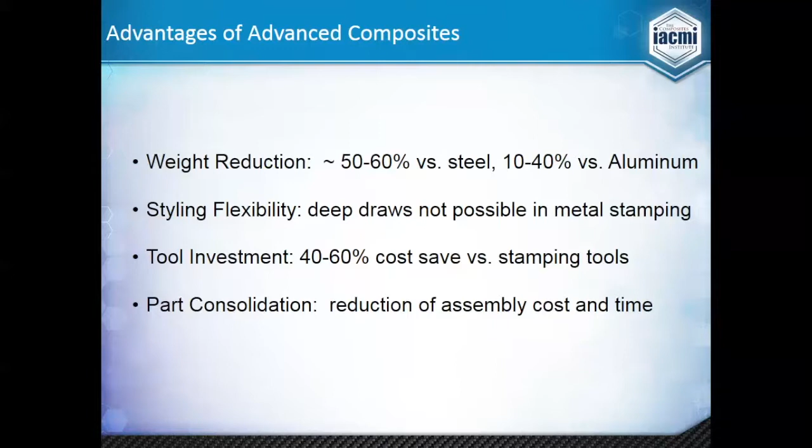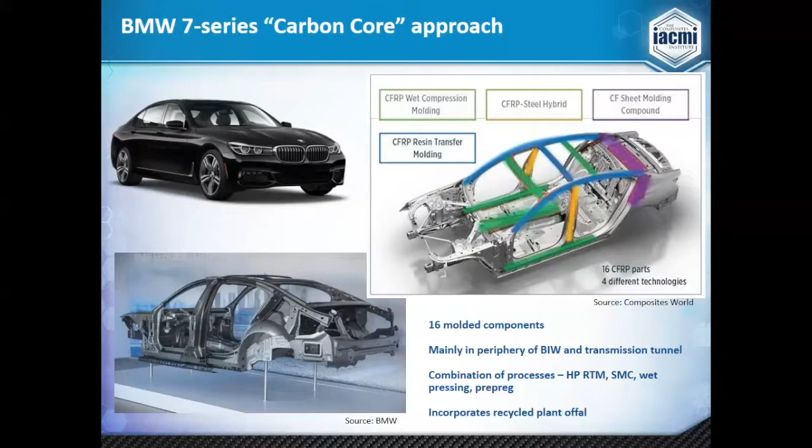People talked for a long time about all-carbon composite cars and full composite structures, but I think we're entering a world where we need to think smartly about multi-material design. BMW has led the way here, taking 16 carbon fiber molded parts and putting them mainly in the periphery of the vehicle to give it overall torsional stiffness. By doing so, they allowed a lot more aluminum and much thinner gauge steel in many areas — basically taking 15 to 20 kilograms of carbon fiber and converting that into a 146 kilogram overall weight saving by downsizing other systems. We think this is probably a real opportunity going forward, and notice they used four different technologies to do this work.

So this creates opportunities. If we look at the world of automotive — and there are obviously opportunities outside automotive too — a global market of 90 million units, with 10% of vehicles going to this approach, assuming we can drive costs down to make it attractive, at 15 kilograms per vehicle, you're talking 135,000 metric tons of carbon fiber. When you add resin and make those into parts, you're talking about 500 million pounds, half a billion pounds of material per year — that's just 10% market penetration with this sort of approach.

But the key thing I really want to emphasize is the number of parts — with these kinds of parts and their average weights, up to 144 million molded parts have to be made every year. That's an awful lot of tools needed. Put this in context of the current market for carbon fiber, which is only about 80,000 metric tons for all applications, including Boeing, Airbus, sporting goods, all current automotive applications, wind turbines, whatever. So we're talking about something that would almost triple the current market at 10% penetration — if you got to 20%, you'd have a 4-times market. So there's a real opportunity to get there.

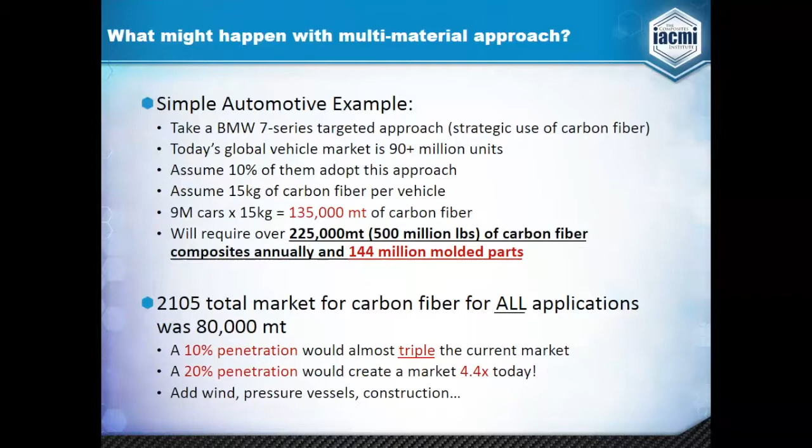Some of the barriers that we see, cost is the biggest barrier—the cost of composite parts and so forth. One is certainly attributed to the material and the high price of carbon fiber, and there's a lot of companies, as well as IACMI, addressing that.

The amount of recapitalization needed—you can't get everybody to throw out all their old processes. So if you're thinking of stamping situations, how can we stamp carbon fiber or recapitalize or use some of those? But there's a tooling aspect to that as well, the retooling that occurs, and then the qualification processes, which tend to be fairly lengthy.

In terms of speed, continuous fiber lamination is an issue. Material transfer robotically is not as fast as it needs to be. And then the big thing is this prototype process, and this really comes into where tooling is important. If we're doing iterative prototyping, the cost of building multiple tools to do that prototyping really lengthens product development, but it adds a lot of cost as well.

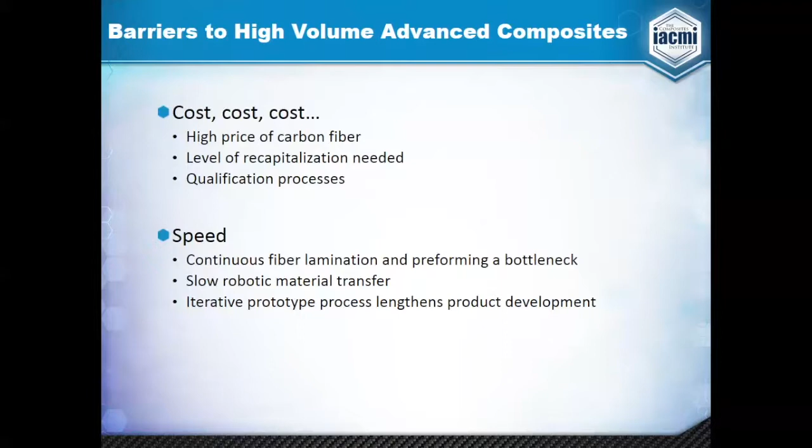From an understanding standpoint, many of our designs today are overly conservative. So we still have to learn how to design to a true minimum mass and take full advantage—that'll take a lot of cost out, cycle time, et cetera. We need more confidence in our manufacturing processes, so the ability to predict what those processes can do and the resulting performance will help us do that. And then, of course, how do we repair composites?

And then from a sustainability standpoint, carbon fiber manufacture is energy intensive. It takes a lot of kilometers to drive a car before you can get the value of that CO2 back. So driving some of that out of the process is very important.

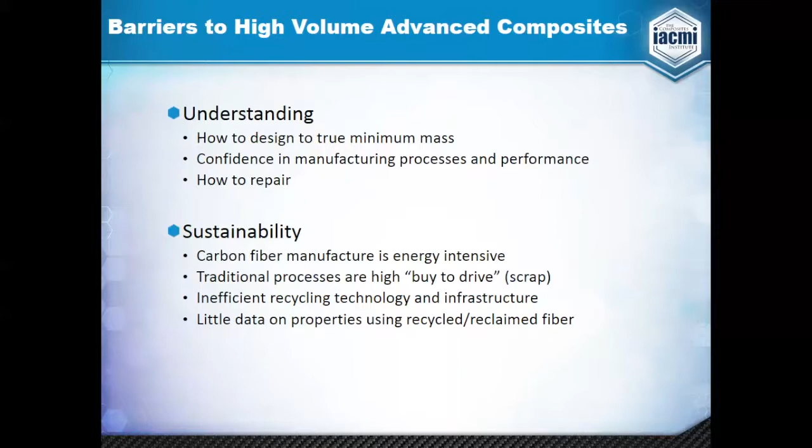The ability to reuse the material—first, let's try to generate less scrap in the factory. Today we take a lot of roll goods, we cut that out, take 30% of it and put it in the garbage, or we have to find a way to recycle it. We don't have that infrastructure in place, but it's coming about, and we're trying to understand that, as well as the data on the properties of using that recycled fiber.

So this really requires an integrated approach to solve this problem, to drive the cost down, drive the understanding up, and to make the value proposition of composites a lot more attractive. So whether that's materials, the manufacturing processes, the design and simulation—all of these need to be worked in parallel. And that's what IACMI is about.

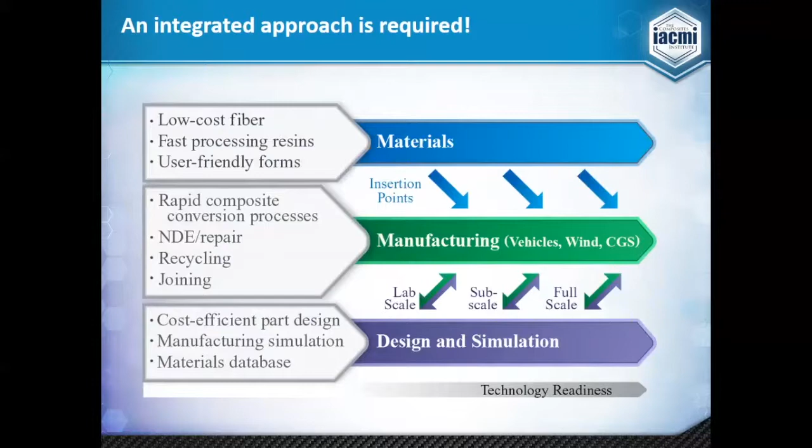So what is IACMI? It's a not-for-profit owned by the University of Tennessee Research Foundation, headquartered in Knoxville. A number of you on the phone call are already members or considering being members. There are 155 members in the consortium, 125 of which are industrial entities, so it's a large amount of the value chain involved, all the way from resins and fibers up through OEMs.

It is a DOE institute, sponsored by the Department of Energy with $70 million in allocated funds over a 5-year period. We're just past the 2-year mark, so there's still almost 3 years to go. And then there's $180 million from various states and other industry partners.

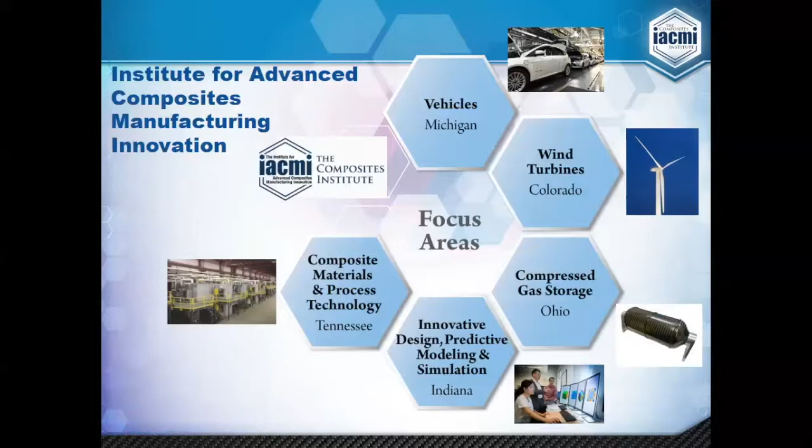It's broken down into 5 technology focus areas. Composite materials and process technology is headquartered out of the Tennessee area. Design, modeling, and simulation out of Indiana. Compressed gas storage out of Ohio. Wind turbines in Colorado. And vehicles, as you might naturally think, headed out of Michigan. There are a number of research institutes and strong university institutes involved across the Midwest and out in Colorado, plus a couple of satellites on the coast.

So all of these entities have a long history with composites and bring a lot of complementary assets and capabilities to make all of this come together and work. While there's some assigned focus, there's a lot of crossover, a lot of integration that's occurred here.

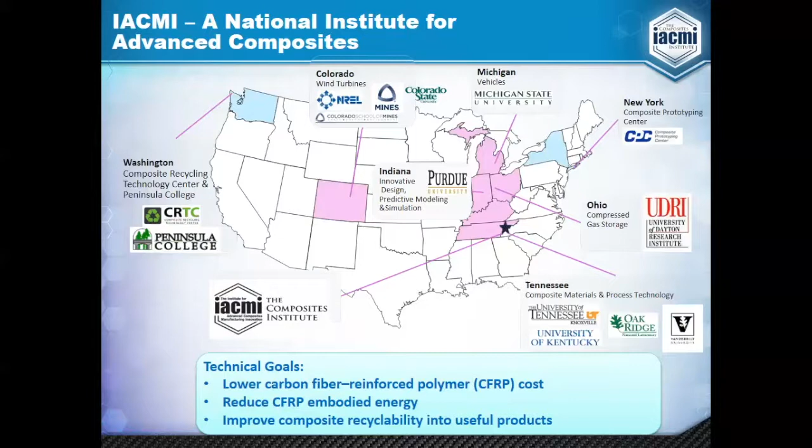The key thing we're really looking at is how we're able to take these technologies and scale them throughout the manufacturing process—all the way back to the fiber level, to maybe prepreg, being able to make prepreg, for example, do intermediate scale molding of that on say a 750-ton press to understand the behavior and the properties, and then go all the way to full scale operation in Michigan at our scale-up facility. And across the bottom line, the modeling and simulation needs to occur across all of those scales to be able to realize cost-effective production of these materials.

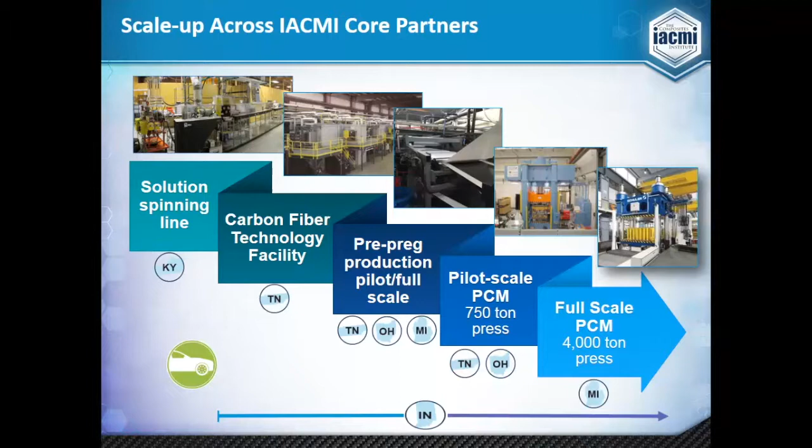When we talk about the opportunity, obviously we have the opportunity to reduce weight, improve performance, and consolidate parts versus traditionally metallic solutions. Composites are also capable of replacing other types of materials, but mostly we're thinking about them as substitutes for metal structures. In order to get confidence from the OEMs, it's necessary to build prototypes that are fully functional and test those to verify that, largely for liability purposes, but to get that confidence so we can get them to convert to composites.

Having been in this industry for 30 plus years, a lot of the impediments people talk about when I've tried to help them convert something from metal to plastic, or metal to composite, is the cost of the prototype tooling. It's a big deal, and the length of doing the prototype tooling is a major impediment.

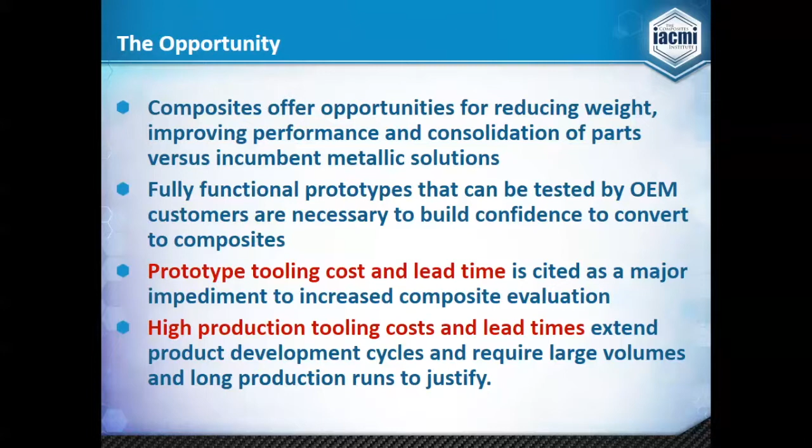And then, even if you get past that point, you have the tooling costs involved, this bit of recapitalization, and those lead times, which for metal tools are often on the order of 26 weeks or more. Those extend the product development cycles and require you to lock in your designs very early, without much flexibility to alter those designs once you've made that commitment to the tooling. They typically require large volumes and long production runs to justify the amortization. So the bigger the tool, the bigger the cost.

Cliff Eberle shared this with me at one point: there's a big truck hood where the rumor was that this tool set, when it was all finished and done, cost $7 million, for an SMC truck hood. It's a pretty big nut. I'm not suggesting we're going to tackle something this size right away, but eventually the idea is to find a way to take a lot of that time and cost out of getting to large tools. Of course, we have to start with small tools.

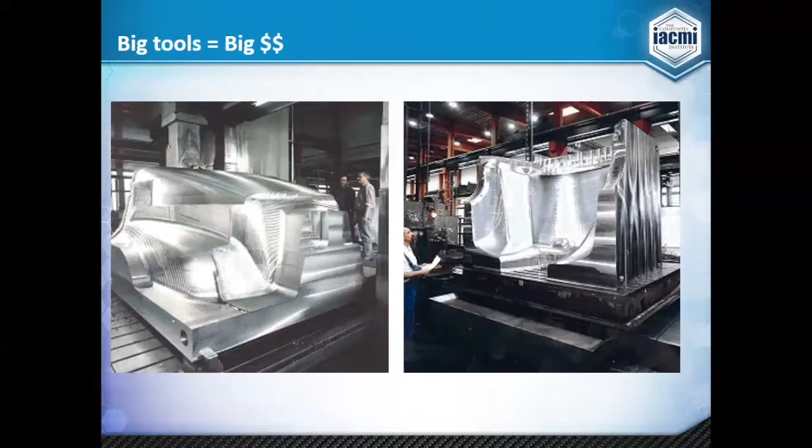A lot of you are familiar with the Big Area Additive Manufacturing at ORNL. This was the Cincinnati machine gantry system that has an extruder doing polymer deposition. The Shelby Cobra was something that's pretty famous, been out there for several years now. It really brought a lot of spotlight onto ORNL and the ability to do high rate polymer manufacturing, hundreds of pounds per hour, versus small printing.

Other work that's been done includes a printed house, a printed Jeep, and a lot of other structures done in thermoplastic, and it continues to advance there, including some work in high temperature polymers like PPS, PES, or PEEK, with carbon fiber for high temperature applications like prototype tooling or autoclave tooling.

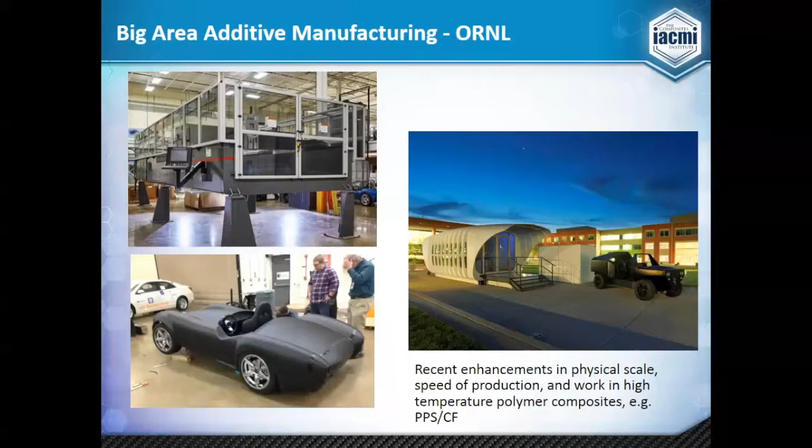But that's been augmented now by work that ORNL has done in 3D printing of metals. ORNL has a lot of capabilities to do 3D printing on a small scale of metals, powder metallurgy, and so forth. So the thought was, how can we get to the kind of rates we need with metal printing, like we've done with polymer printing? Some of these early results are very promising.

This was an example of an excavator where the cab was 3D printed in polymers, and the stick, the part that does the work out in the digging end of the excavator, was 3D printed in metal. I've got a video of this to show you being printed, but that's steel out there that was printed from scratch, not welded together and machined back.

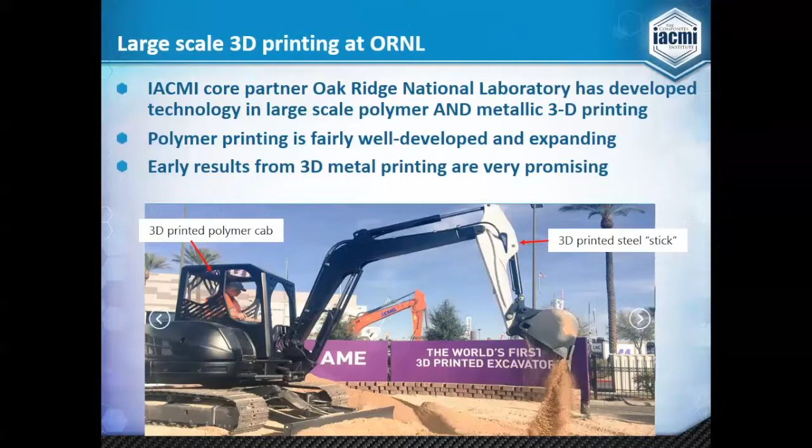A little bit of a video here you can see of that. This is courtesy of Suresh Babu from the University of Tennessee, Knoxville. This was done at ORNL. You can see the video up here of building that particular element, and it comes together pretty quickly. It's obviously a time-lapse video, but there's a lot of metal being added and deposited, very similar to the way we do polymer printing.

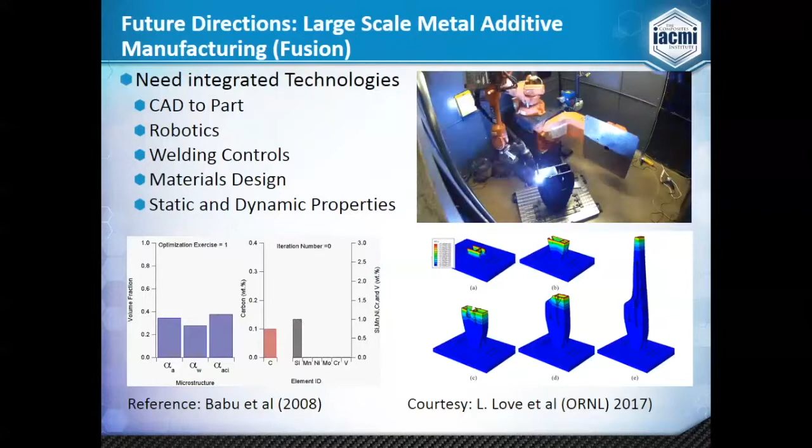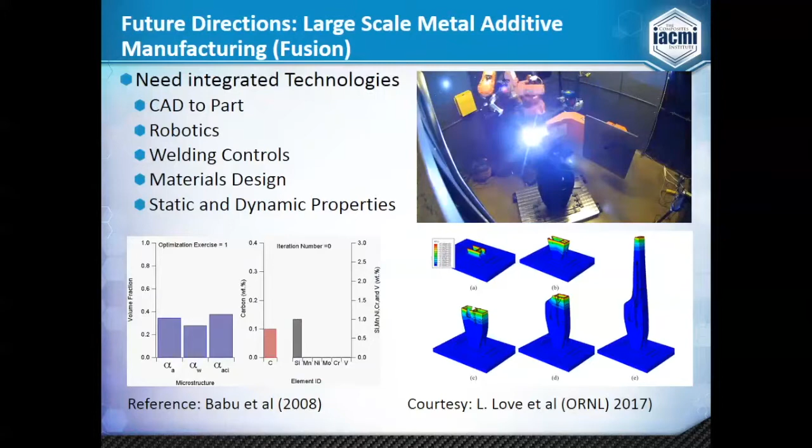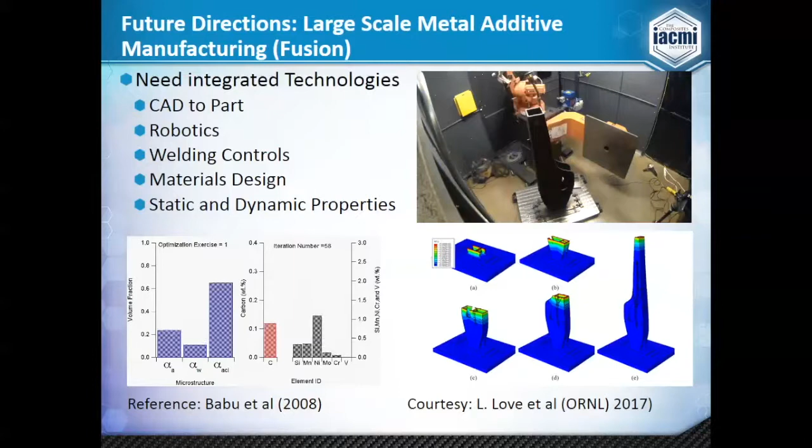So you get kind of a corduroy type surface on that, and I'll have some photos that hint at what that looks like. All of this will require a little bit of machining at the end, but it's not nearly the kind of thing where you take a giant steel block and do all subtractive manufacturing on it. There's a lot of science that goes into this, looking at the microstructure at various points and how that changes. At this point, we certainly haven't done everything with every kind of metal, but it certainly points the way toward being able to get down this path.

So let's talk about the project we want to do, which is really about trying to make molds with this—compression molds, eventually injection molds, certainly autoclave tools—that can be made in a rapid fashion and hopefully at a much lower cost. The big objective is to get the cost and lead time of production down. We're not necessarily at this point trying to attack the Class A surface part of that, although that opportunity is still out there.

But for many parts that don't quite require a true polished Class A finish, we think this has opportunity. The key targets would be to reduce cost by at least 50% over conventional subtractive metal mold making, and up to an 80% lead time reduction, maybe more, depending upon complexity and size.

We're not talking about just doing small things. Within the next couple of years, we want to target getting up to a 50 square foot surface, something that's 7 feet by 7 feet or larger, so a 2 meter by 2 meter part surface, with good depth of draw, not just flat panels, but able to get at least an 8-inch depth of draw.

That would cover a lot of parts that are out there in the automotive space and other markets. We definitely want to be able to look at complex features. How do we get the ribs in? We'll obviously need ejector pins, and eventually build these with slides as well.

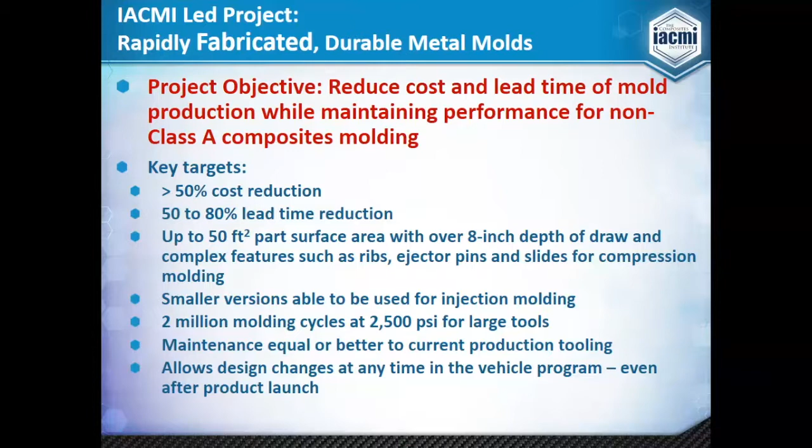We've actually taken some long fiber thermoplastic that came out of an extruder and stamped out some thermoplastic parts. While the tool wasn't being actively heated and cooled in this situation, we were able to mold some parts on it, just as an example.

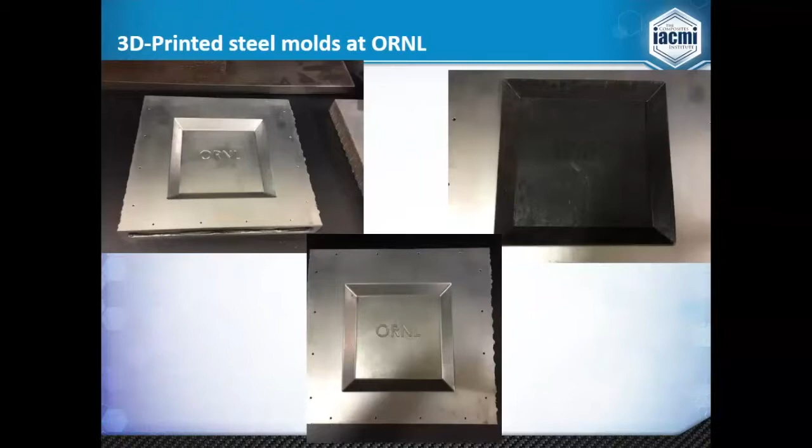Another picture of that die set. One of the things you can see here is the opportunity, if you build hollow structures with a face sheet and then what's inside behind those face sheets, you can have various structures to handle the pressures that are there, but also create cavities that allow you to do things.

For creative heating and cooling solutions, for example, you might cast a lower temperature metal such as aluminum or copper or an alloy of those behind in that annulus, and then put your heating elements inside that. Aluminum and copper, for example, have much higher thermal conductivity, so it might enable much faster molding cycles and so forth.

So just opportunities to get really creative with this sort of technology. Of course, there's always the opportunity to just build it 100% monolithic, but I think this opens up design space a lot for tools.

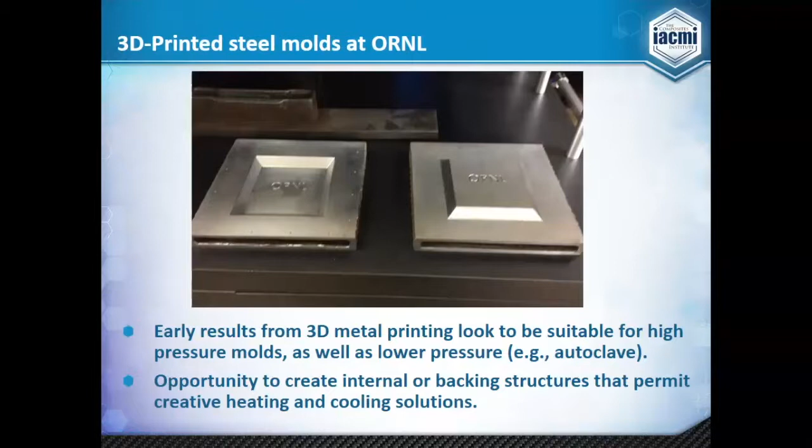So as we think about this, we're still working through the timing on how long it takes to get there, but we see it as a progressive effort, starting with something relatively flat, like a tool for compression molding at 1,000 psi and achieving at least 100 cycles, followed by higher pressure and higher cycles.

We may be able to get through these first couple fairly quickly, and then look at something more complex, maybe a double dome shape or some other shape that the industry comes together and says we need to do, including ribs and other features, and then again demonstrate that at similar pressures and cycles, and then move on.

Try to get on up toward that 50 square feet, progressively testing at higher pressures, and continuing on longer cycles. At each step of the way, we need to understand what we need to modify, what needs to be fixed, and what other features need to be added. So this is just a preliminary approach over a several year period to get there.

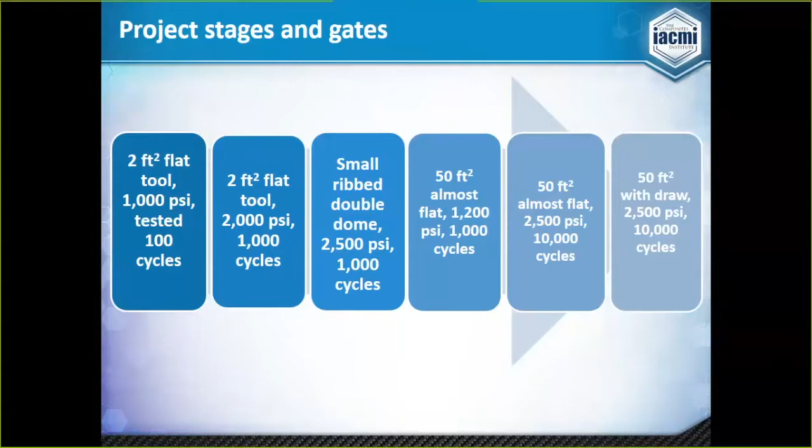So the project itself is an open call. What we're looking for is for people to indicate their interest by the end of September this year, so we can try to get the project agreement written up and get the project underway by the first quarter of 2018. If new members join IACMI, we're looking at the opportunity, in the early stages where technology levels are still relatively low and applicability is still at an early development stage, to be able to continue to join, maybe for the first year.

Any additions to that after the first year would have to be by consensus from those who are already in, who have made the investments in time and cash to participate.

So in order to participate, and many of you on the call are already involved in IACMI projects, therefore you've already signed a master sub-agreement, a one-time agreement between the industrial member and IACMI that governs a lot of the overarching project rules. Once the project agreement is in place, each participant will need to sign that project agreement, not all at once, but as they come on board to be part of the project.

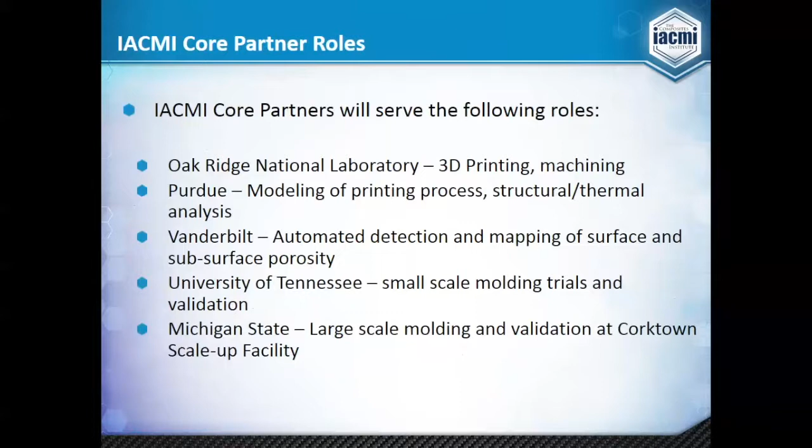And at the University of Tennessee and at Michigan State, the scale-up facility and our Corktown facility, is where we would start by doing the small-scale molding trials and validation. So as we're developing this, we at least start those there before we send them out to industry to test in your shops.

For industrial participants, clearly what we need to do -- we've got a starting idea of what types of requirements we're going to need -- but I think one of the early tasks will be to convene all the industrial participants and agree upon the particular performance requirements in terms of surface finish, durability, hardness, temperature requirements, and so forth. What are we trying to get to, both in the early stages and longer term? And then how can we develop that transition strategy to take this technology to the field?

So finalizing that project plan, circulating it, socializing it, agreeing on the schedule, the budgets, what the stage gates are, what our metrics are, our go gates, milestones, and so forth.

What are the representative parts we want to look at? What are the tool geometries that are of interest to industry? We're not trying to solve every part out there, but certainly for a wide range of parts, perhaps 75% or so there's possible solutions out of this. We would look to say which are the ones that give us confidence that this technology has real value.

We would expect that you as industry would want to validate this technology in-house, under real conditions with the types of materials that you buy and use. So the ability, if we're going to print tools, we could print 4 or 5 copies of them and distribute those to some of the industrial members to go test and try, and then come back to us with feedback.

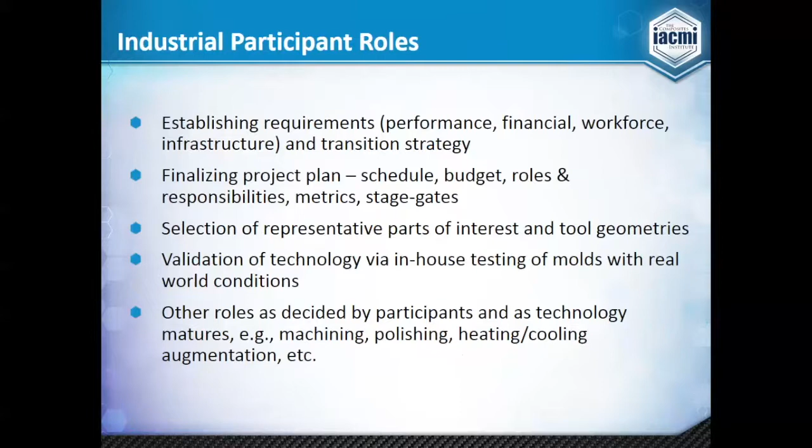And of course there'll be other roles as you decide. If we have tooling shops that are part of this process that can build these, there might be machining and polishing opportunities there. There's lots of technology options for heating and cooling out there, whether strictly through fluid heating, electrical heating, air impingement, induction, whatever—all kinds of opportunities to play in that role.

So it's going to require some amount of cost-sharing. There will be federal funding and state funding available out through the IACMI process, but typically we're looking to get a one-to-one industry funding match to our state and federal funding.

So we think this project has a budget of about 5 to 8 million dollars over 3 years. Whether 3 years is the right length will be determined by the team as we come together. Obviously we want to get there as fast as we can. I've challenged the lead project investigators, the PIs, to try to see how far we can get in the first 2 years.

So we've been expecting to try to get, with enough partners involved, $1 to $1.5 million of cost share, of which 1/3 would be cash and the rest in kind. So everybody that participates would need to commit some in-kind participation.

The large business participants would be the ones providing the major cash contributions, and if an SME is participating but not in an in-kind fashion, they would probably have some cash requirement, although not a very large one, but it would be something to make sure there's a buy-in there.

So again, it's going to come down to simple math. When we get to a budget, if we've got 50 companies participating, it's probably going to look pretty attractive on an annual basis to those companies participating.

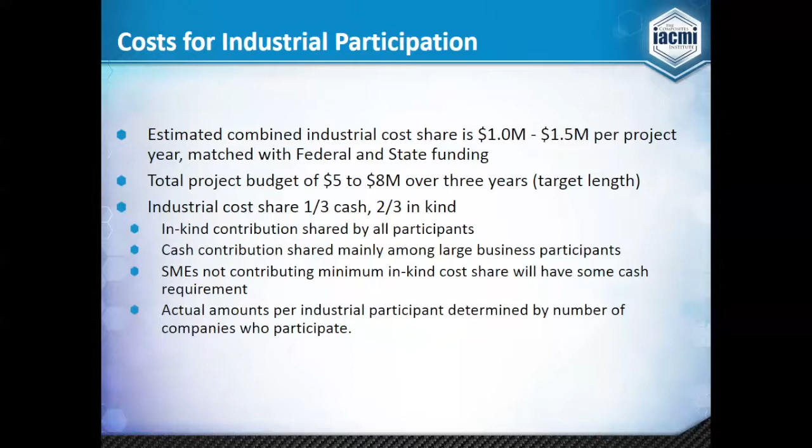So what do you get at the end of this? IACMI has an intellectual property management plan, available on our website, so it's something you're aware of if you're already an IACMI member and have signed the master sub-agreement. But basically, if you develop IP related to this technology outside the project, you own that.

But everybody who's signed the project agreement and made the required cost share contributions will have what's called undivided ownership in the jointly developed IP, which would allow you to practice and license that. There is a U.S. manufacturing clause that says these technologies need to be commercialized first in the U.S. before they're commercialized outside the U.S.

Any technology developed exclusively by a core partner, such as ORNL or Vanderbilt or others, will be licensable on a limited exclusivity basis first to all industry partners that have participated. So it's a pretty generous IP arrangement—if you're in, you'll have the right to go practice this technology in your business.